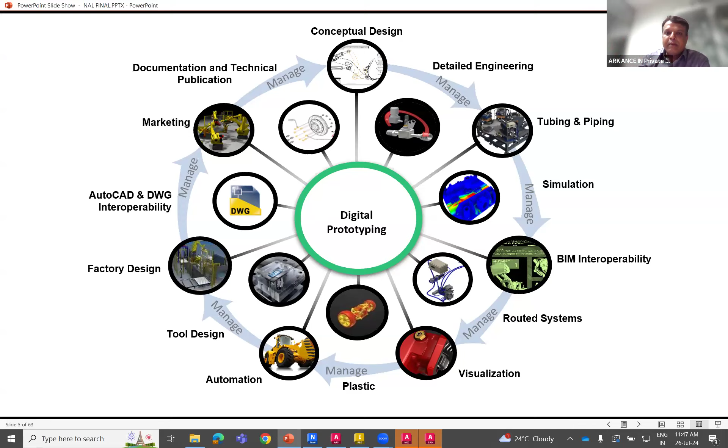Now, when we come to industrial needs, what customers are expecting in today's generation is a connected workflow. When you speak about connected workflow, what happens - I want to connect AutoCAD with Inventor for 3D modeling. Can I connect the Inventor 3D model to an FEA? Why? Because I'm going to have data connectivity and the data loss will be zero.

If I change the conceptual design, it's going to update in my 2D or 3D or the documentation drawing. Till today, what we do is create a 3D model and extract a drawing out of that so we can take a printout. Now, the input file itself is 2D.

At that time, what do we do? Again, we recreate it in 3D modeling software. In this scenario, the designer is losing about 30 to 40% of their drafting hours. I've seen customers using AutoCAD, then NX, AutoCAD CATIA, and AutoCAD SolidWorks - third-party CAD software, we call it.

Now, from 2016 onwards, our own Autodesk portfolio customers asked us, can we connect AutoCAD with 3D modeling? Why? So we can save time - anyway we are using both products from Autodesk itself.

Our development team worked this out and released this option in 2018, but till today only a few designers know this, because when we speak, we speak at the top level and they were less bothered - like 'we need Autodesk portfolio,' they just procure it.

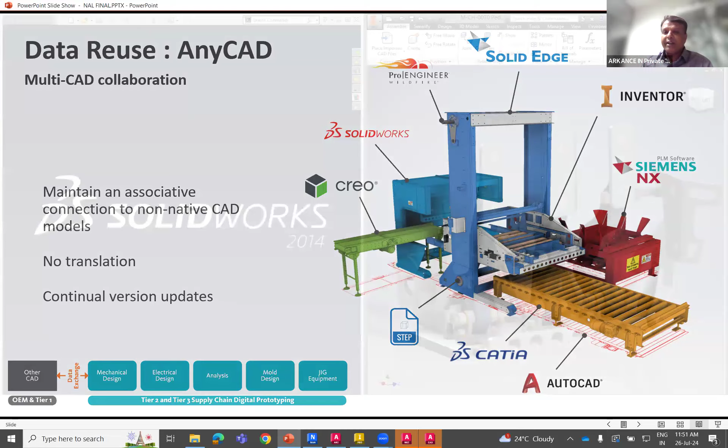And for the AutoCAD option, we call it DWG underlay. I'm going to highlight this connectivity between SolidWorks and Inventor. Later, I'm going to show you a live demonstration on AutoCAD 2D to 3D.

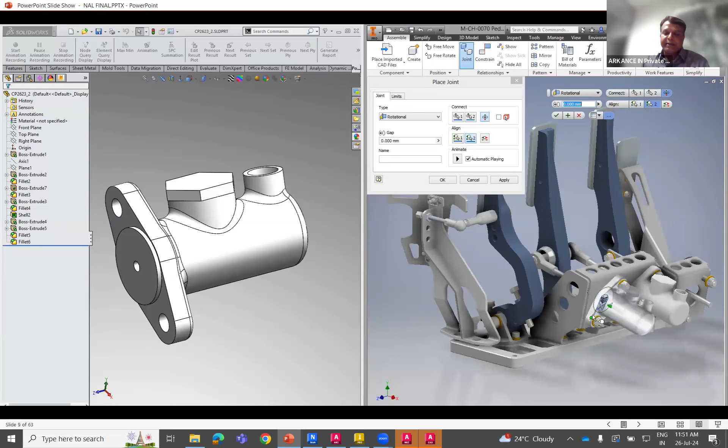Now, left-hand side is my SolidWorks. I'm opening a SolidWorks file in Inventor, and I'm going to use it for a regular assembly. Once I've erected these parts into my regular assembly, I request a design change - this is a wrong part, kindly update.

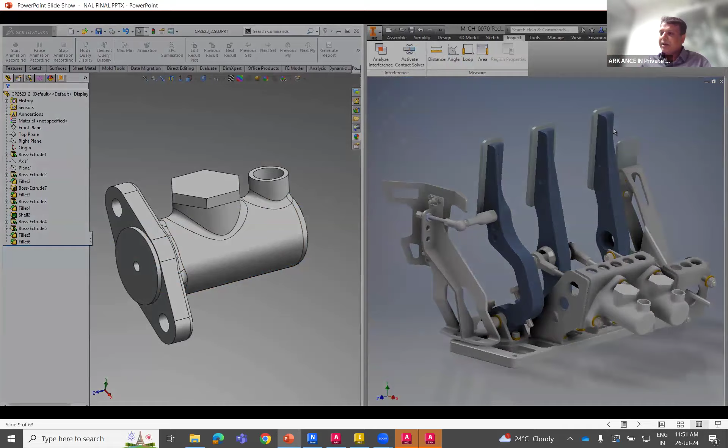The SolidWorks user is in the same intranet connection - let him change the design. Whatever design changes he makes, once he saves in his system, it's going to update in my system. Earlier, whenever there was a design change, we needed to delete the model and re-import it. Now, as third-party CAD software is connected with Inventor, and Inventor Nastran uses the platform of Inventor, changes done in the third-party CAD software will reflect in the CAD environment as well as in my FE environment. I'm going to show this live in the second session.

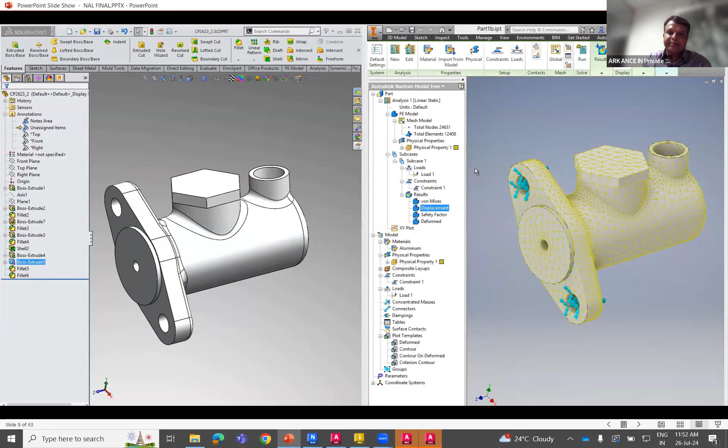So this is just an introduction, that's it. Whenever you have design changes in the FE environment, just update the meshes - no need to re-import the model and reapply all your loads and constraints. Just update your meshes, run the simulation, and extract the results. This is the connectivity between CAD domains, whether it's 2D to 3D or third-party CAD software to Autodesk.

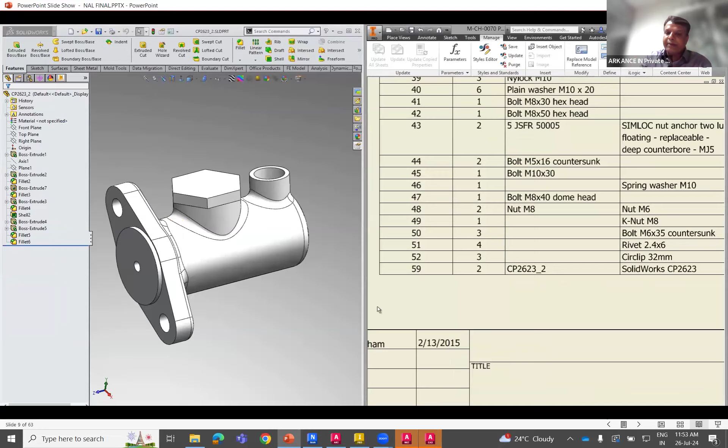And Autodesk Inventor is not only connecting the data between third-party CAD software, we can even read the metadata. Now, I have assigned some metadata in SolidWorks or NX or CATIA - that metadata can be read in Autodesk Inventor. It means some part number or reference number. This is how we are good with connecting with third-party CAD software along with Autodesk.

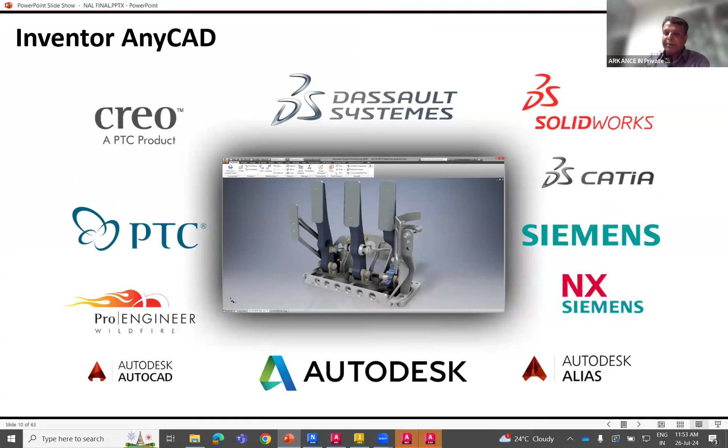Whenever we look at the Autodesk portfolio, we have AutoCAD, and Alias design also we can connect. Alias design is mainly used for Class A surface modeling. People will say Autodesk Inventor cannot handle Class A surface modeling, but we don't have an add-on for Class A surface modeling - we created a separate solution called Autodesk Alias design. Alias itself has three flavors.

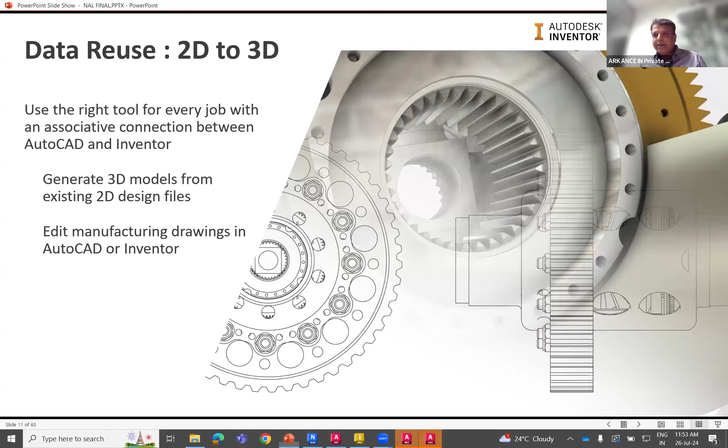Okay, now let us check into 2D to 3D connectivity. Let me launch AutoCAD. Okay, this is my AutoCAD tool. I have some other things got launched. Let me use AutoCAD Mechanical.

Can you able to see my CAD screen? Kindly confirm, Nishan. Yes, right now, yeah, I can see.

Just let me start from scratch. I'm going with new. Okay, I'm going to select metric.

I'm going to explain this from command to command. What we call this is UCS - UCS coordinate. People may ask, in 3D modeling, I want to take left side view, right side view, so we have this UCS. What happens in AutoCAD? AutoCAD even has a UCS. Sometimes your UCS will be always on the left bottom, and you don't know how to locate 0, comma 0. In AutoCAD, we have a coordinates method called the absolute coordinate method.

Let me say UCS icon, there is one command. If you enter that command, and you don't want that UCS to appear always on the origin, type UCS icon and say it as no origin. Then wherever you go on the coordinate value, the UCS will be on the left bottom corner. So whenever you're doing R&D on the 2D to 3D linking, this is important because every CAD file speaks to the other domain with that origin.

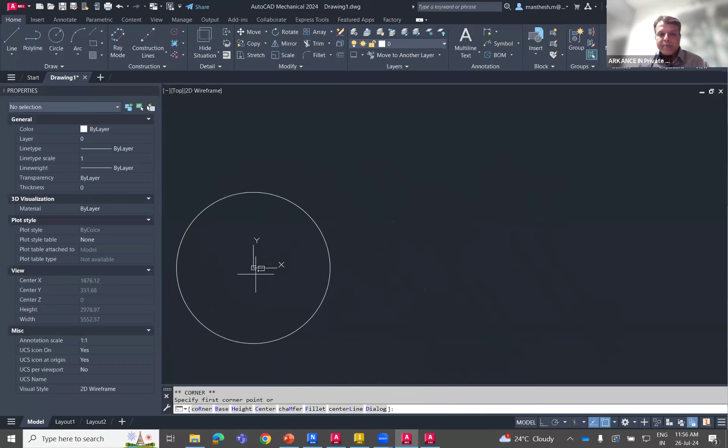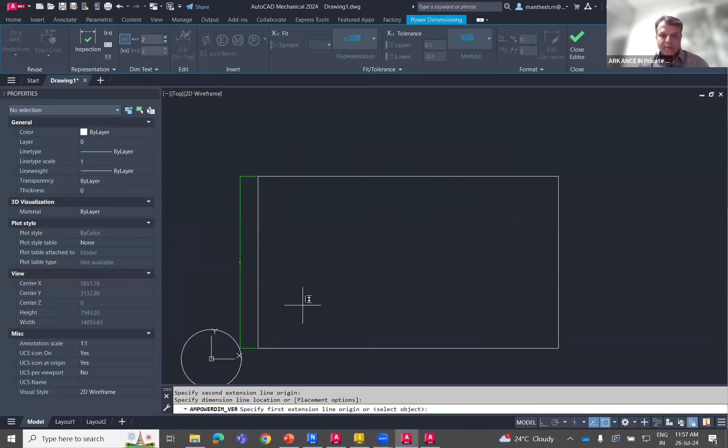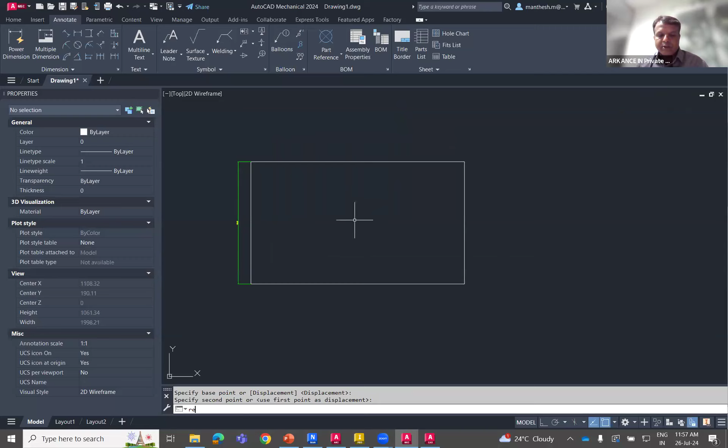Now I'm going to create a rectangle. Simply, roughly, I'm going to create a rectangle here. Let me check with a few annotations, somewhere about 438. And I'm going to use this. Now what happens after creating this, I need to have a few slots. I can have some slots, simply I'm going to create this.

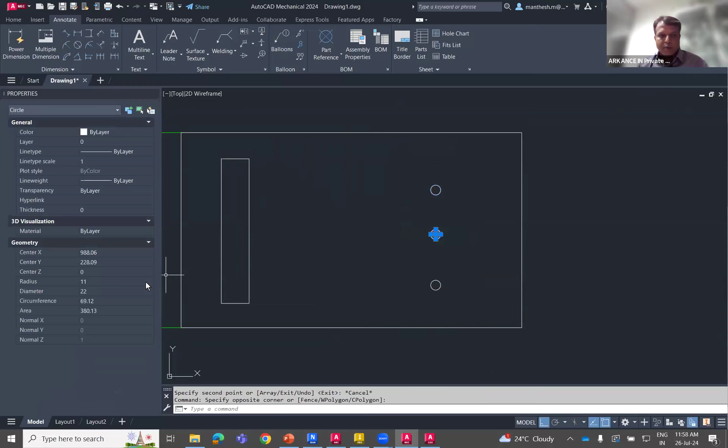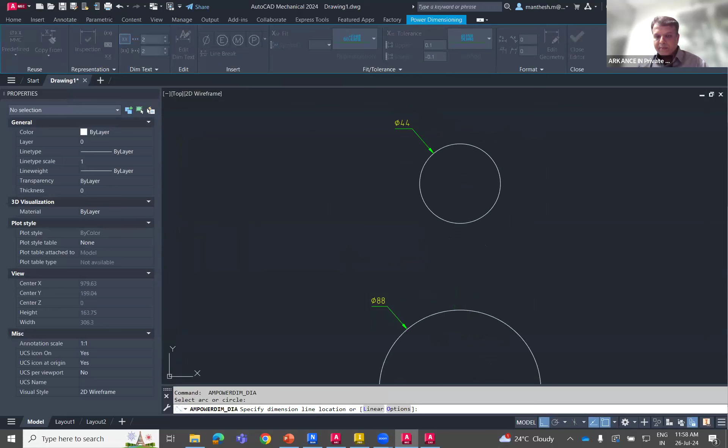Now I have a few holes, the dia 22. Again, I'm going to copy this with an F8. I'm going to make this as dia 44 and this has 88. Now let us assign a few dimensions. There, I have this slot.

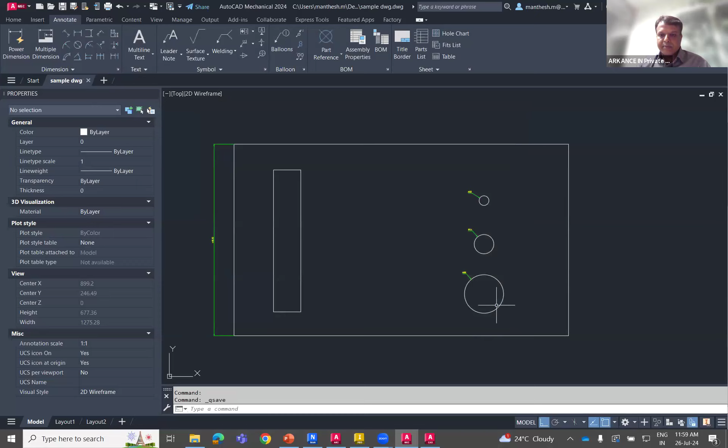I want to link all the files to my Inventor Professional and create it as a 3D model. Now let me save this file into my desktop. I'm going to save it, say it as sample, DWG. I'm going to save this. Done. So this is my reference drawing.

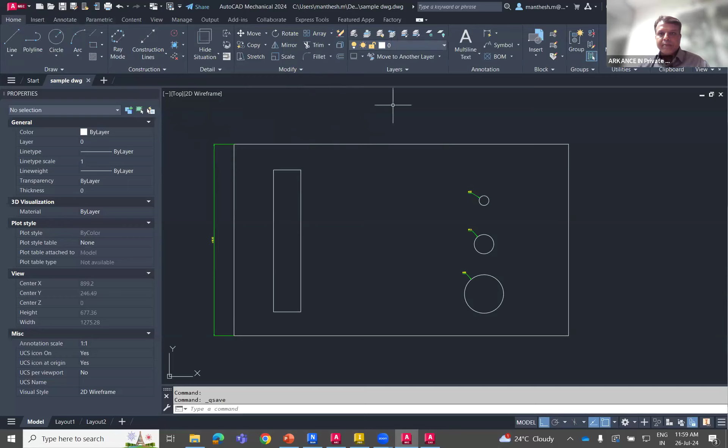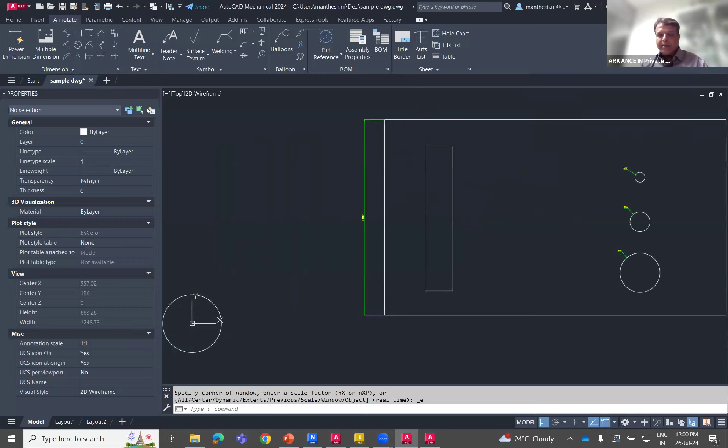Now whenever I'm using AutoCAD Mechanical or AutoCAD, automatically layers are created. Assume that I'm going to use some center marks. So the origin is here. I have saved this file. Now to connect this file with my 3D software.

Just launch Inventor - already I have launched the Inventor. So whenever I launch the Inventor, this is how my user interface looks. So what we do is just say new, then metric. I want to create it as a part, standard MMIPT.

Before entering into the sketch environment, I want to link my AutoCAD file. Before doing that, I have saved this file and let me close this so that the data connectivity will be very easy. We use this import command to import any other 3D file formats. The same command I'm going to use, import, but I'm browsing my CAD file. On the desktop I have that file, this is the sample drawing. I'm going to open it.

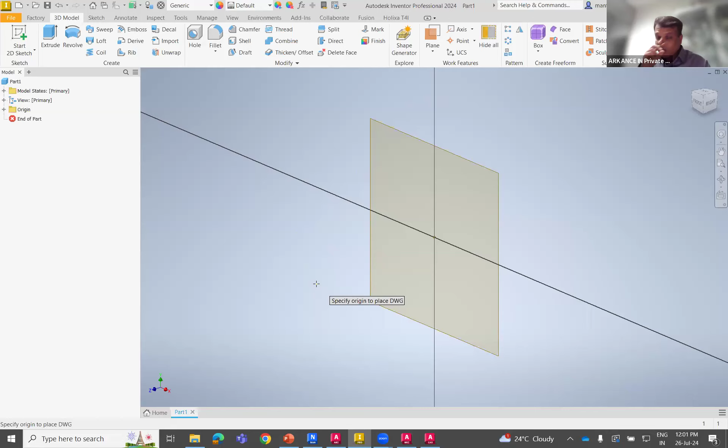So it will ask on which plane you want to connect this - okay, on this XY plane. And what it is asking on the command prompt is specify origin to place. Now what I'm going to locate is the AutoCAD origin - origin must be on my CAD origin. See, the origin I located is the center of the circle, which is aligning with my Inventor part modeling center point.

Till now it's clear. Any doubts till now? If you have any doubts, kindly post it in Q&A.

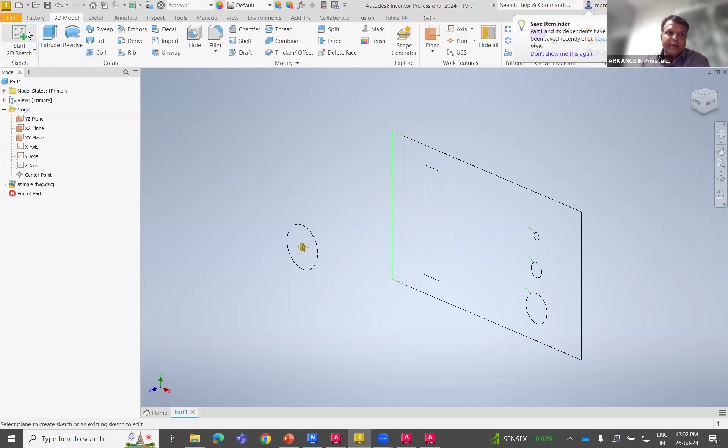Okay, I assume that it's clear. Now, I have to say, I have linked the file, still I have not converted as Inventor sketches. What I'm going to do is start a 2D sketch. I'm going to select a plane. See, I want to create a sketch, so I need to have a plane. I'm going to select a plane which is parallel to this profile imported.

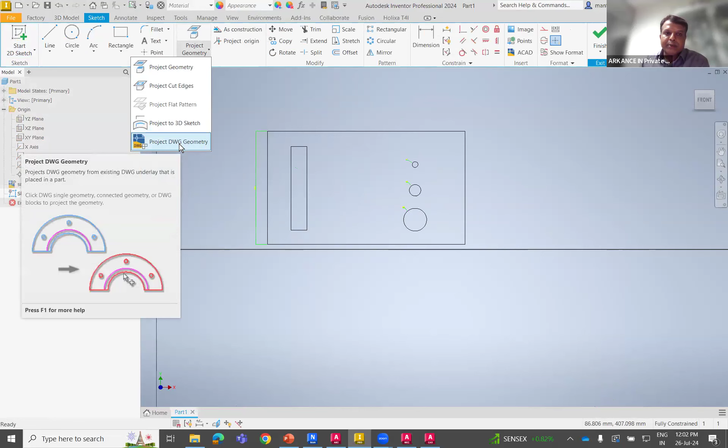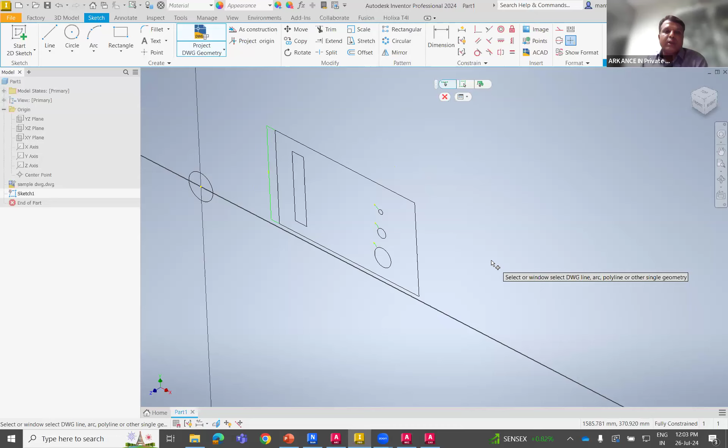Now, in the project geometry option in the sketch environment, I'm going to highlight. We have something called project DWG geometry. Use this - which are the lines? Whenever I import or link an AutoCAD file, it will be having data connectivity. At that time, I'm going to get all my hidden line construction lines. But to create a 3D model, what I need is only the profile line. It will highlight which profile lines you want to use, so I can project only those geometries.

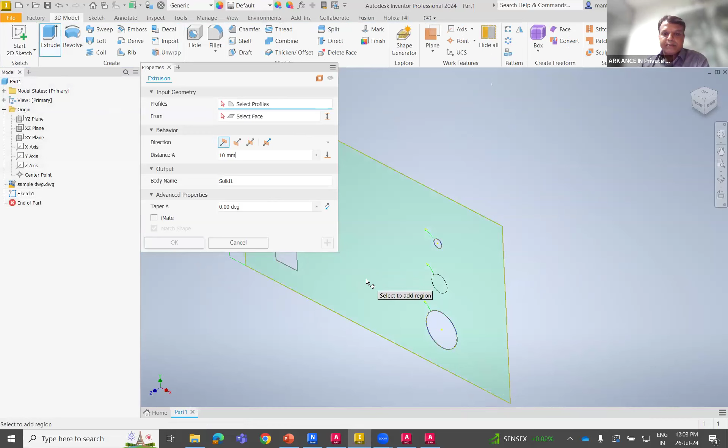Okay, see? Right click. Okay, done. I'm going to set it as finish sketch. I'm going to use the extrude command. This must be like 10 units. Okay. Now this has to be projected out.

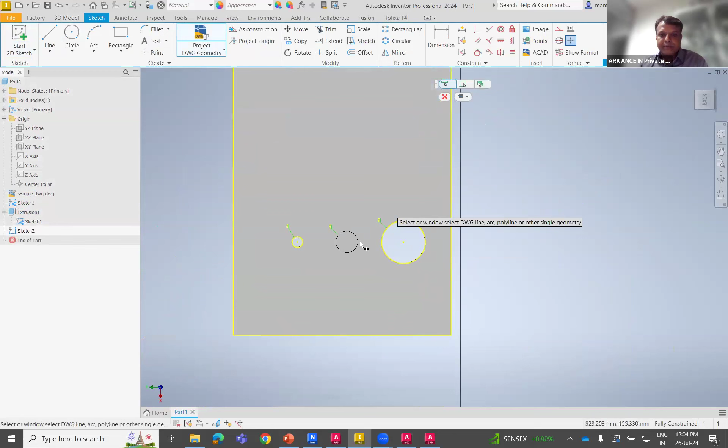So after having sketch one, I can right click and share the sketch if you want to reuse it, or else start a new 2D sketch, project geometry, finish, and now use it for extrude.

I'm going to save this file. Same project, I'm going to name it as part one or project one, something like that.

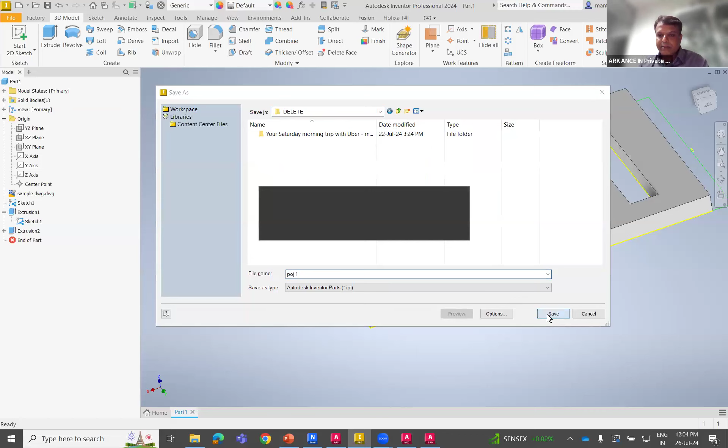Now, one good thing is whenever I link a 2D file to Inventor Professional, and I'm not going to assign any parameters here - I haven't created any parameters - but if I observe what automatic parameters it has created, let us check that. See, one is like 40mm the height of extrusion, and another the holes we have created, that's it. But on the XY plane there is nothing like parameters added.

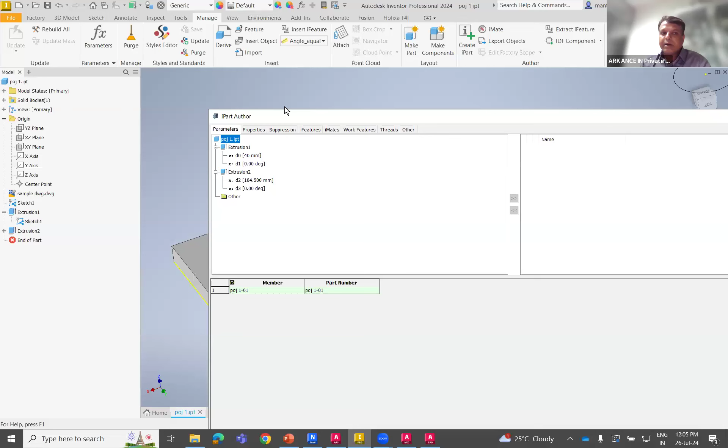So if I go to manage and want to create it as an iPart, see, I don't have any extra parameter other than the height of extrusion 1 and extrusion 2. This is one drawback if you're linking your CAD files this way - you cannot create all the features which you need in iParts. So always ensure whenever you're starting the design by linking 2D to 3D, you cannot call the 2D data for iParts.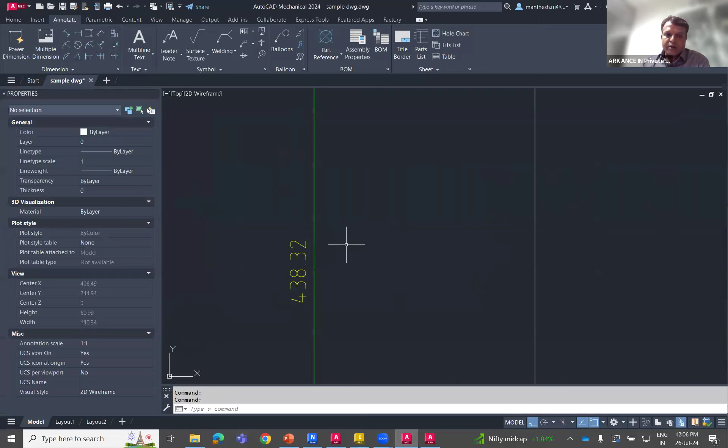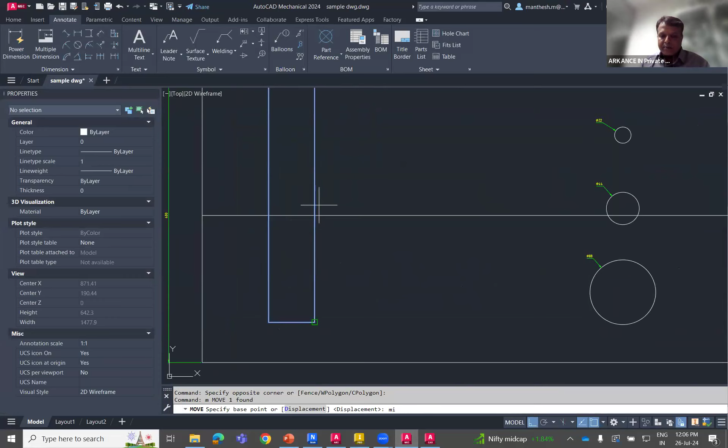Already I've saved this. Now I need some revisions. I can open my 2D drawing. Now this is about 438.32. I want to reduce the width to 38.32. Okay, I want to bring it along the center. Let me bring this slot. And this radius, I want to make it 22. And again, this has to be 22.

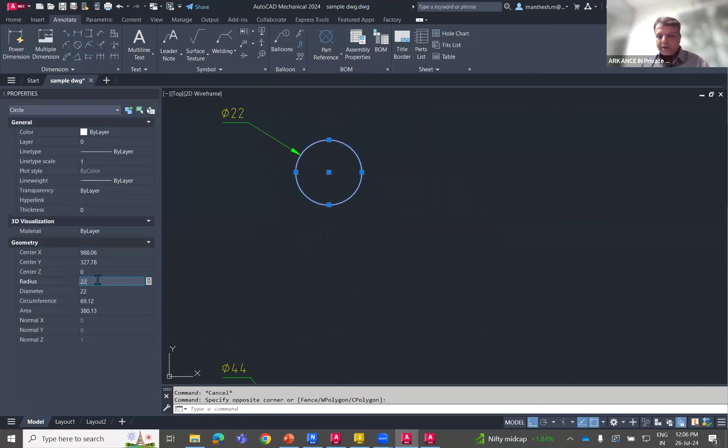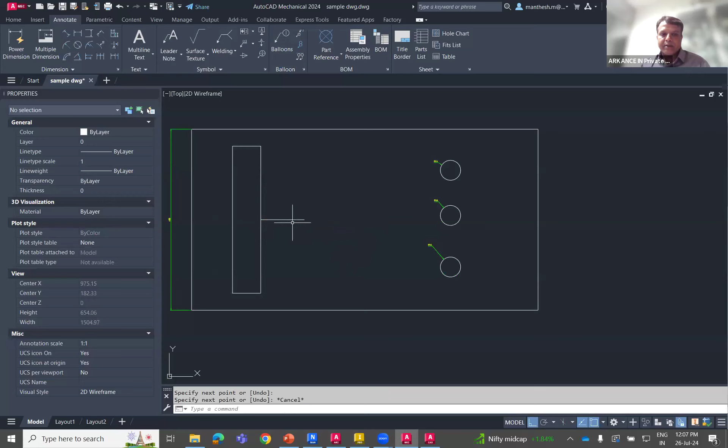Now, when we projected this, assume that if I make this an open loop, what happens is the extrude will give a warning mark, and you need to reselect the profile. People may ask, if I add some objects here, now this is done - if I add some more thing on this particular detailing, let me take an example, something like this, move it 30 units. What happens now? Now these profiles are not projected.

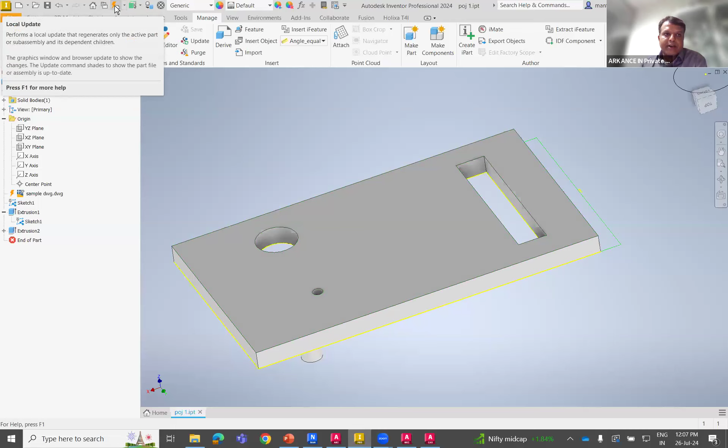I'm going to save this, close. Now let me check in Inventor. There is no update, but there is an automatic update highlighting with a warning mark. Pick it - see what has happened. It has kept the previous one.

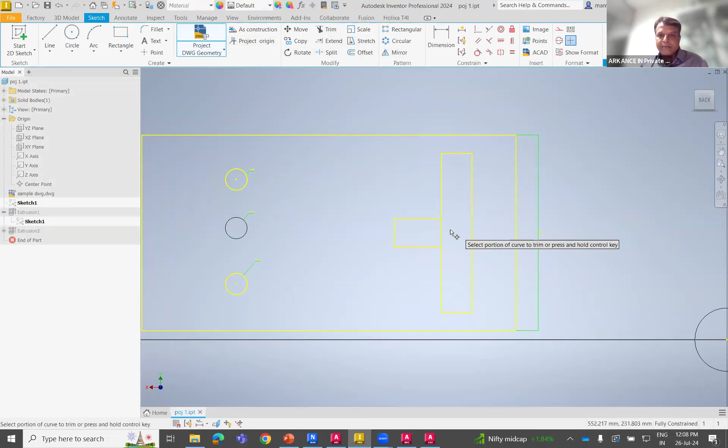Again, I can enter into sketch one because the projected thing is not lost. Project geometry - I can use this, then I can use it. Okay, I cannot use it straight there. Let me delete this. Again, project geometry - this.

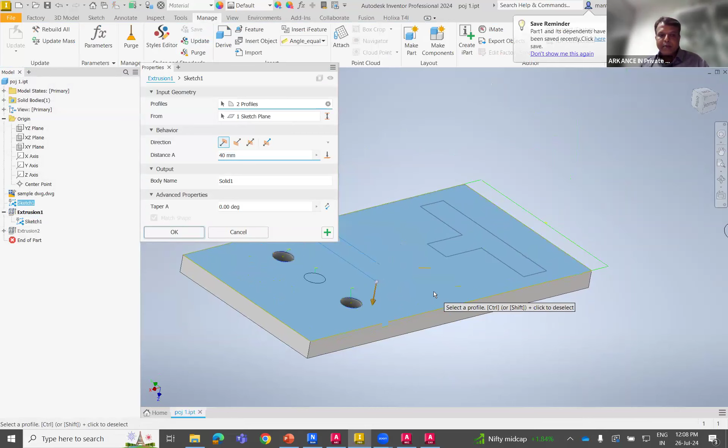Finish sketch. Okay, and even on extrusion one, either I can select the profile or else directly go with one more extrusion to cut the material. But if you observe, for an already existing profile, changes in the values are automatically updated. But whenever you have changes in the shape, or the closed profile is making certain changes, at that time you really need to rework on this, because when you select with the create option, you need to select that particular area there.

Am I clear till now? Any doubts, guys?

There was a question from Mallikarjun about dimensioning - whether layers were created beforehand. No, layers are created automatically in AutoCAD Mechanical. AutoCAD Mechanical is one of the automation tools which will create the layers automatically. But that automatic layer creation option is not there in regular AutoCAD. If you use the vanilla flavor of AutoCAD, you won't get that. You need to install AutoCAD Mechanical only to get the layers created automatically.

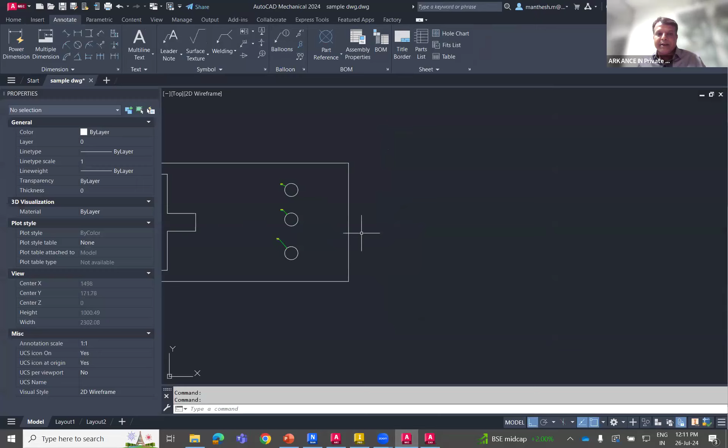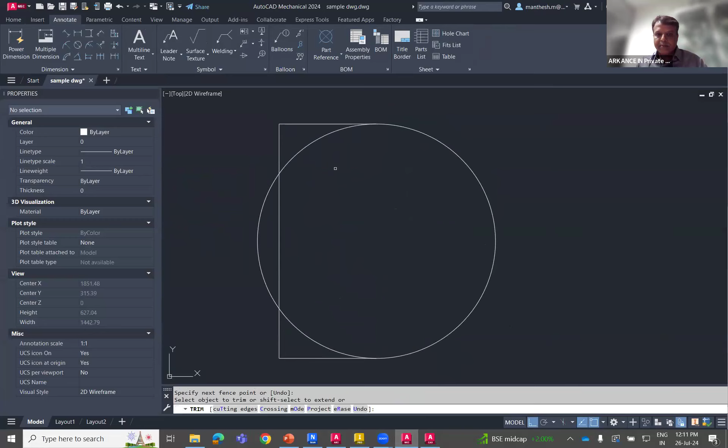Let us forget about this design. Let us create some new design, something like this. Midpoint, node, quadrant, perpendicular, tangent. Something like this.

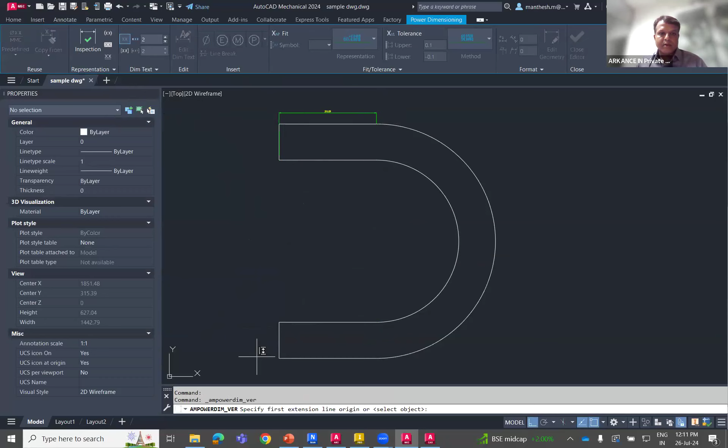I need your attention now. Basically, what happens - a few of the designers are very intelligent. Is it? What do they do?

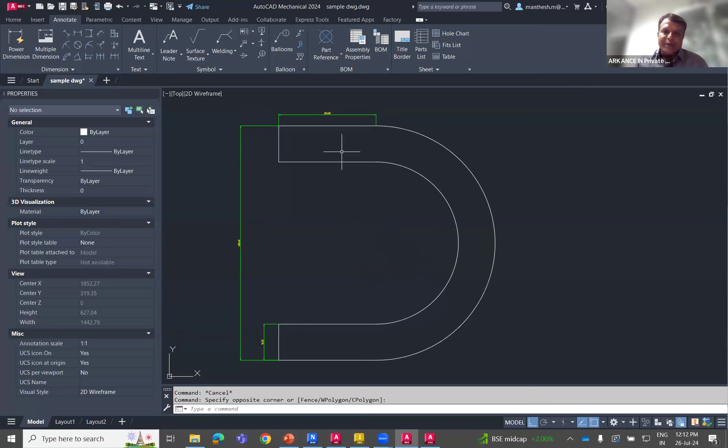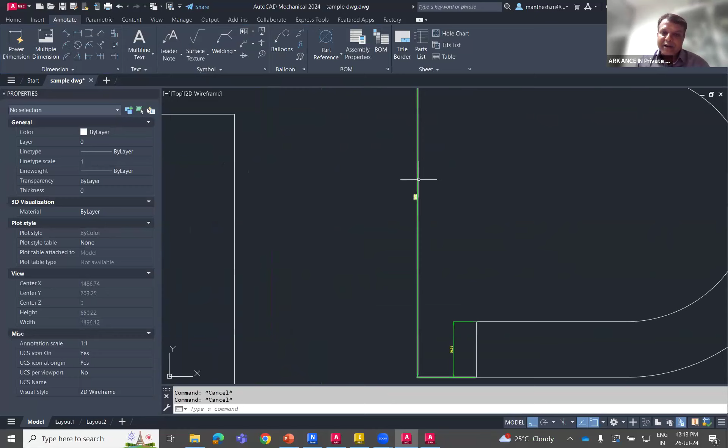Everything works on an origin or a reference point. Now I have this - there are a few very intelligent designers. Assume this has to be 500 or 496. What they do is they won't change the drawing - they double click on this, delete it, and type it as 500. Then what will the designer, draftsman or manufacturer do? He will assume the total length is 500.

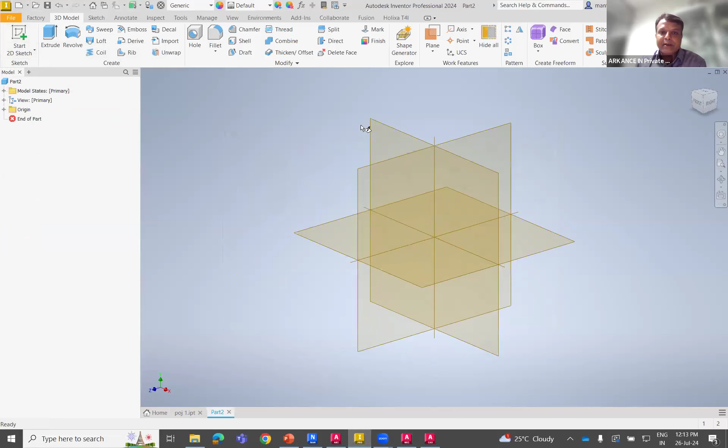If I link the drawing, whatever parameters you have edited are nowhere concerned because it works on the profile line. Now we have one more option - I can copy the file with Control C, and come to Inventor. Let me take a new file, then enter into the sketch environment, select the plane, now paste with Control V.

Yeah, completely everything we have here. But if you observe the communication area, 16 dimensions needed. Got it? But observe this value - intentionally we changed it in AutoCAD to 500, but it has taken the exact measurements. Whatever annotations or dimensions you give in AutoCAD, when you copy and paste to Inventor sketches, automatically it will get converted as dimensional constraints in Inventor, and it will take the exact parameter.

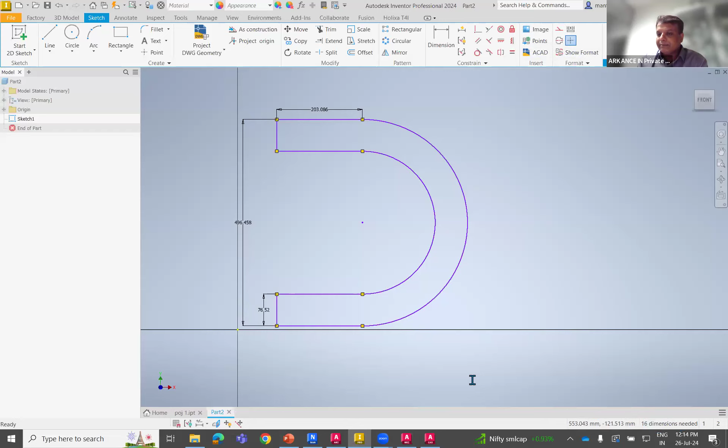If you have overwritten it, it won't allow 500 - it will come back to the original thing. That's why we call it parametrical software. Now there is no link between AutoCAD and this file, but the thing is I need another 16 dimensions. Is it? Okay, let me select undo, Control Z. Sorry, cancel.

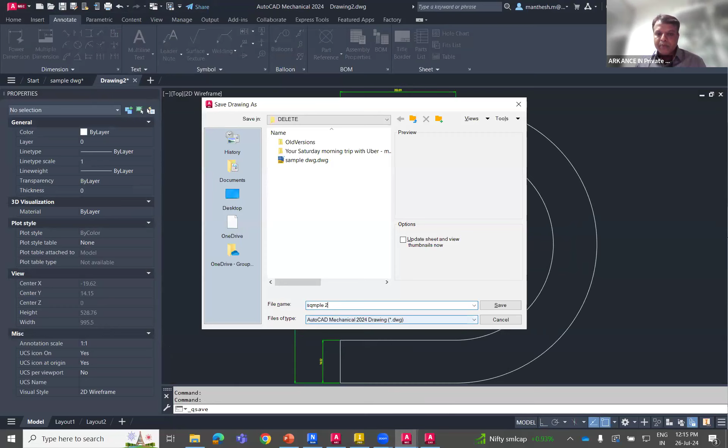Now there is one more method of bringing a CAD file. I'm going to paste it in a new file with Control V. I'm going to move the center to origin 0,0. Save this in the same folder as Sample 2 - this is an independent drawing. I'm going to close this and come back to Inventor.

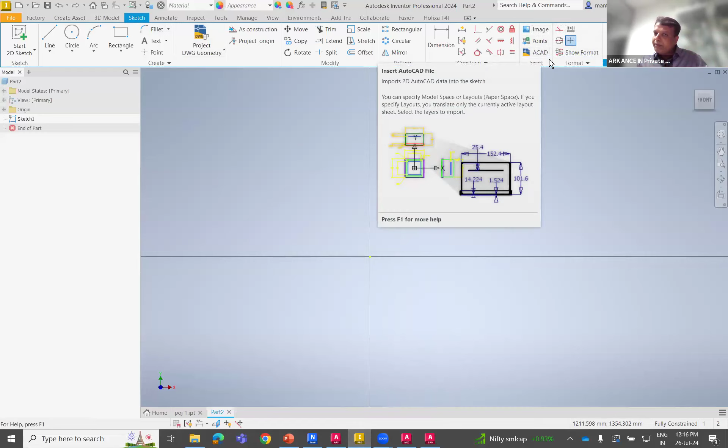I want to bring the CAD file, so just as earlier, open the sketch environment. In the option, once you enter the sketch environment, we now have something called insert from AutoCAD. So I need your attention here - whenever you use this command, still there will be no link between 2D to 3D. If you need to have a link, before entering the sketch environment, use the import option instead. AutoCAD, Sample 2, open it. Yes. When I use this insert command, it will take about 3-4 seconds to scan the entire drawing.

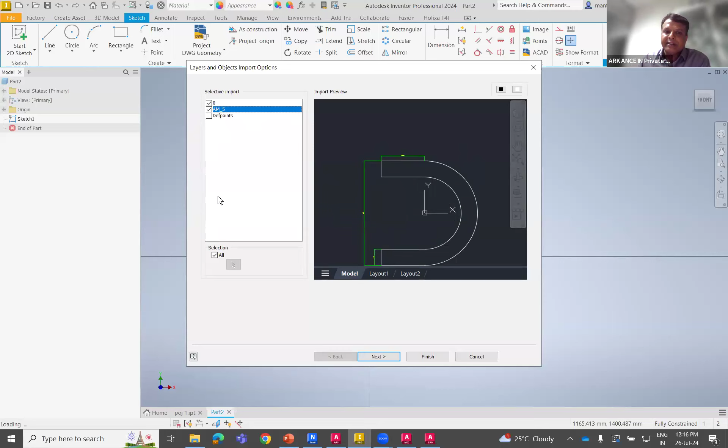And I'm going to get a pop-up menu. Now, if you are really using layers, what happens - I'm going to get all my hidden lines, everything, is it? If I use copy and paste, I can switch off those things I won't need. See, I need both of them. I don't want these def points. If you have hidden construction lines, you can disable those layers here.

Okay, don't just say finish, pick next. I need your attention again on the screen with 50% concentration. Detected units mm, then constraints endpoint - I want all the endpoints to be constrained, something like geometrical constraints, where a horizontal line gets horizontal constraints and a vertical line gets vertical constraints. I can select - if you have any blocks from AutoCAD, you can convert them into Inventor blocks. Then say finish.

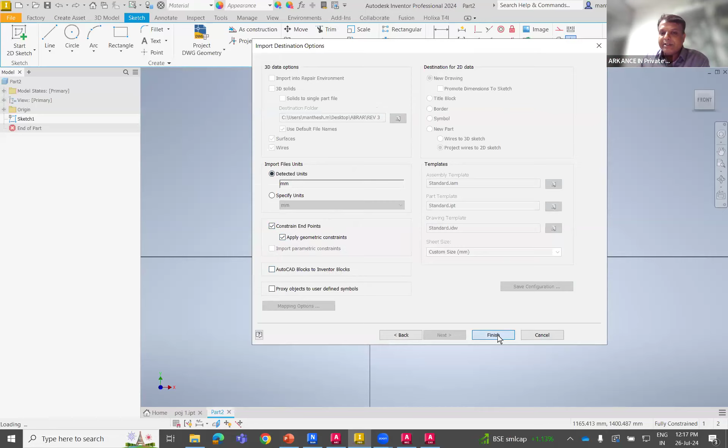Now, how many constraints do we need here? Let me select Control Z. Only 3 dimensions - earlier how much did we have? 16. Now if I use this option like insert from AutoCAD, there is no link, but I can reduce the constraints. Whichever parameters are not given, I can create those parameters, is it?

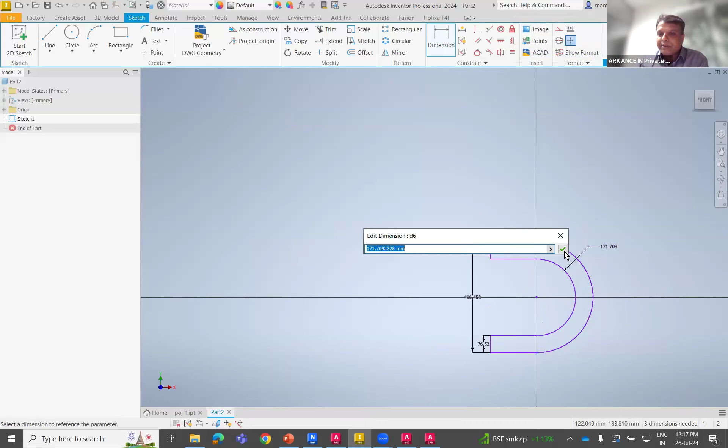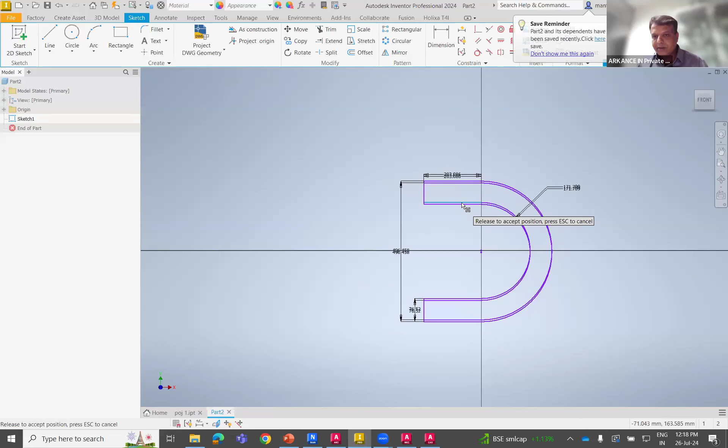Answer. Okay. Then, okay, 3 dimensions again is somewhere missing. Again another 2 dimensions - just you can surf with those dimensions.

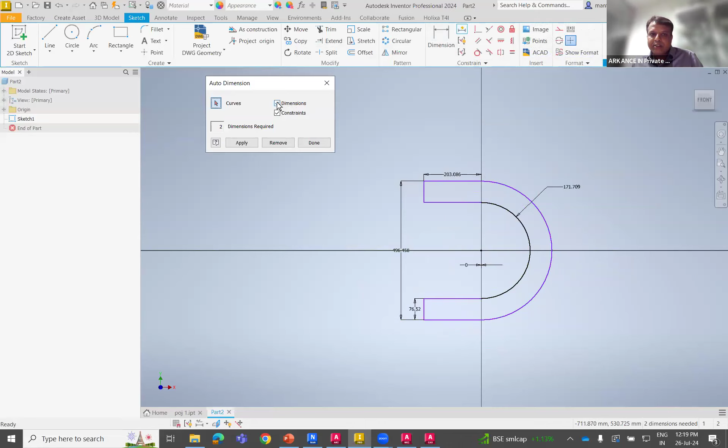If you trust that whatever you have created in AutoCAD is 100% right, in this option you can use automatic dimension constraints. Whenever you get this, use only dimensions, remove the geometrical constraints, apply. See, we have a few things like on the origin - it may be some points which have not got constraint. That's the problem. Remove it, and you can check and delete those.

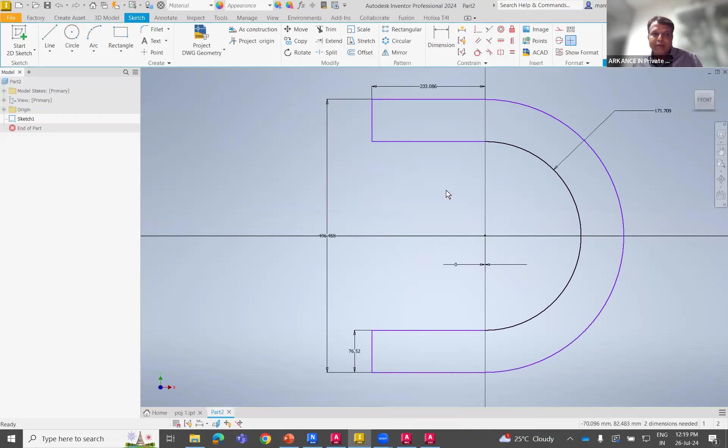So you would have done it before, or else again you can say project origin, and project that, and do the constraints. But still here you don't have. I'm going to recommend either you link the file or use this insert option. Never use copy and paste.

Okay, finish sketch, and even if you have inserted from AutoCAD, you can enable these parameters for your iPart creations.

Now I had a question: can I see that is one view, what happens on the other side of the view? Assume that a file has a top view and a side view. So side view has to be created on the side. Now the top view is there.

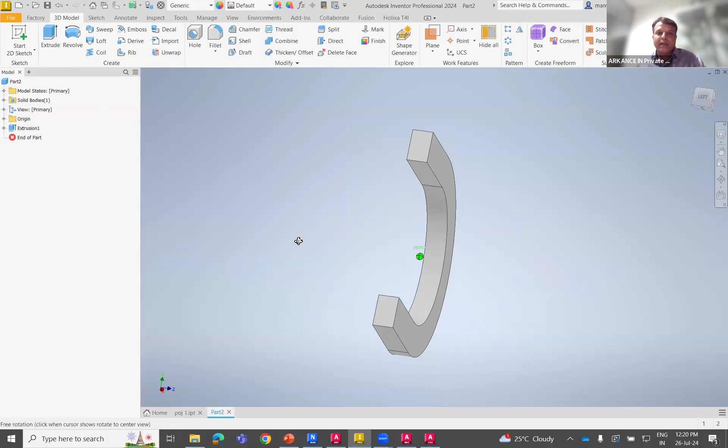The side view you want to link - at that time go to import, select the same file. If you have any side view with an origin, you can import that on any plane with the origin placement. Then you can use it like a side view. Just create one simple rectangle with the thickness and try it.

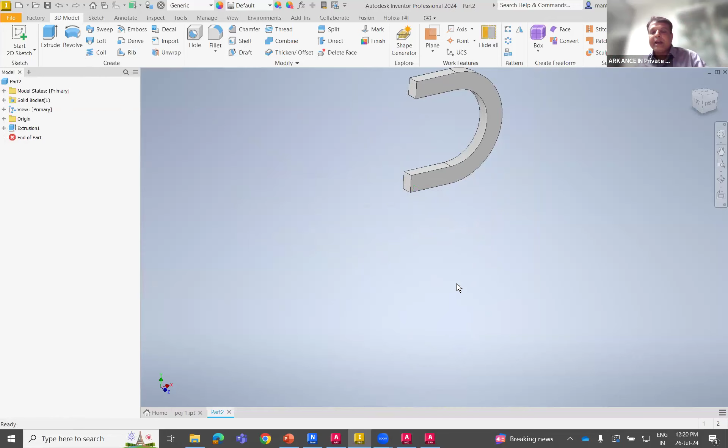It works. And Kashyap asked me like, does it work the reverse way? Now this is one part - I pulled it from 2D to 3D. Post that, what happens? We are going to create a documentation file, is it?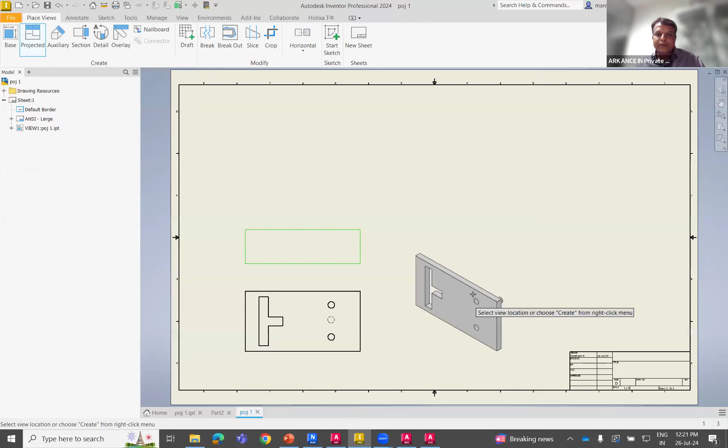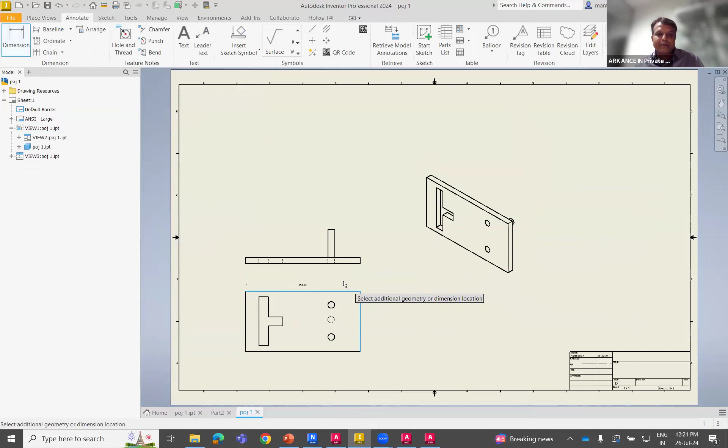We always trust 3D, not 2D. Now if you create any parameters here, okay, now you have to change this. If you change the value, that has to get updated in the 3D model. Really, as of now, it's not there. 2D value - so if you need that, it has to be done in AutoCAD itself. If you're changing in 2D, you change in 2D. Now if you change in AutoCAD, even this will get changed.

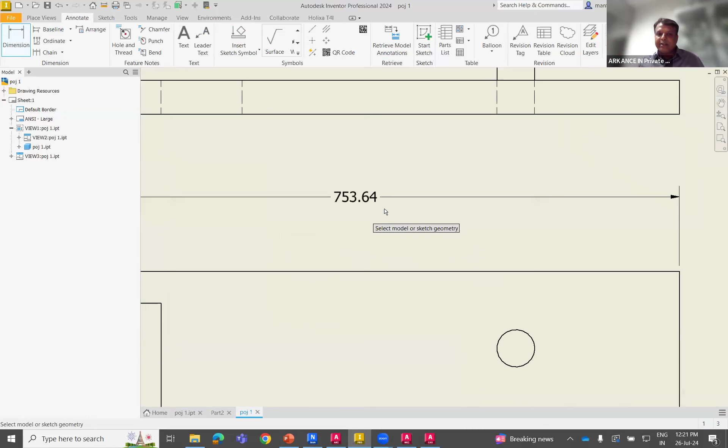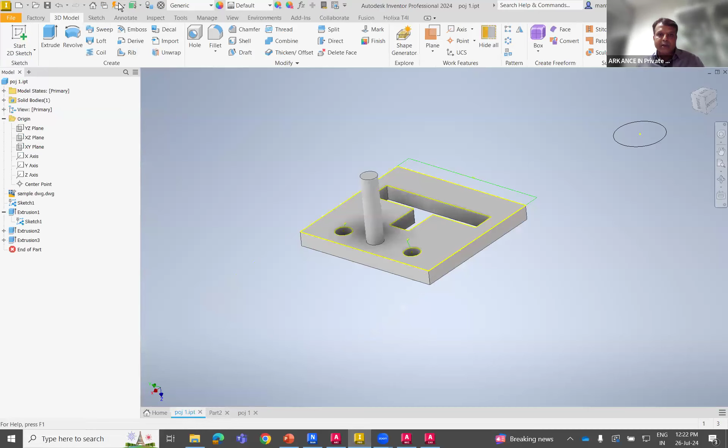If you want me to demonstrate the same, okay, let me reduce this. Save this. Close. And what happens in the part model? Automatic update. What happens in the documentation? Automatically updated. Clear?

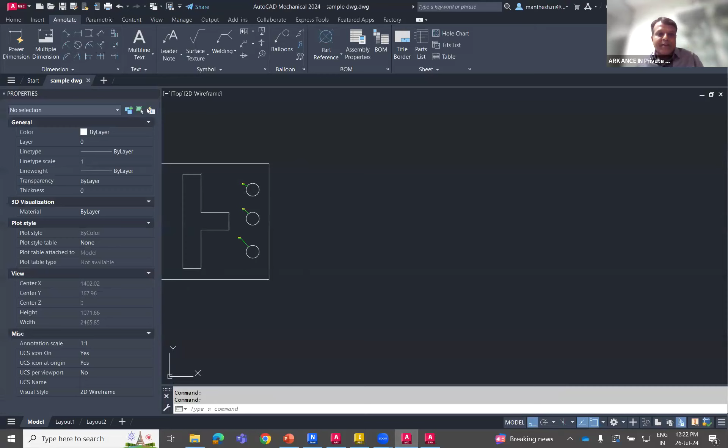One or the other way, I can give you a solution. As 2D is linked with 3D, and again from 3D we have extracted 2D, change in AutoCAD. Now in AutoCAD itself, somebody will ask like, I don't want to use this stretch and other command - it just has to be driven from the value. Now this is a dimension, is it?

What I can do is use an option called parametric. Then linear constraint. I don't want to use the stretch command - just everything should work on the values. Then I can use like perpendicular - this has to be perpendicular to this, and this has to be perpendicular to this. Same like Inventor constraints, and this has to be perpendicular to this.

Now only changing the value of the object should get updated. Double click on this one. Now make it 600. Object changes. Save it. Check in Inventor. Update. Check in documentation. Update it. See.

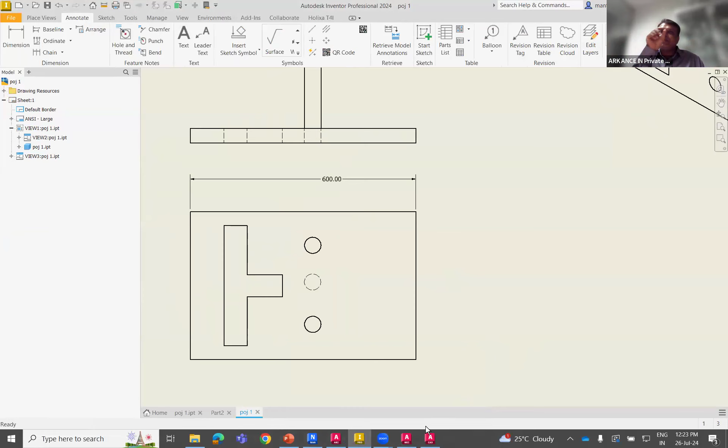Initially, I always recommend when you're starting something, whether it's a product or a big assembly, plan your end goal. What is it that you need at the end? Whether I need to control everything from AutoCAD, or whether I want to control everything from parametrical dimensions only. At that time, you can use dimensional constraints in AutoCAD and drive the object through that. These features really help a designer when you're building everything from small things. But there is a difference between a designer and a draftsman, a designer and a 3D modeling guy. These are the things which will enhance your skills along with product knowledge.

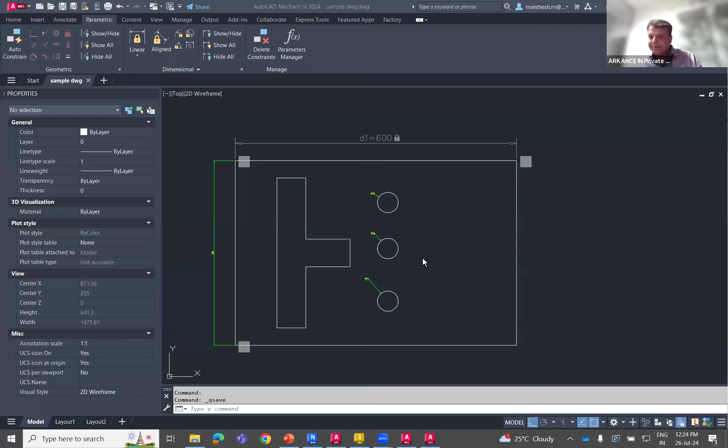Hope that Kashyap, I have answered your query. Siddharth Reddy and Mallikarjun, I never recommend you, as a professional user of Autodesk Inventor, to use copy and paste. Kindly insert it from AutoCAD instead.

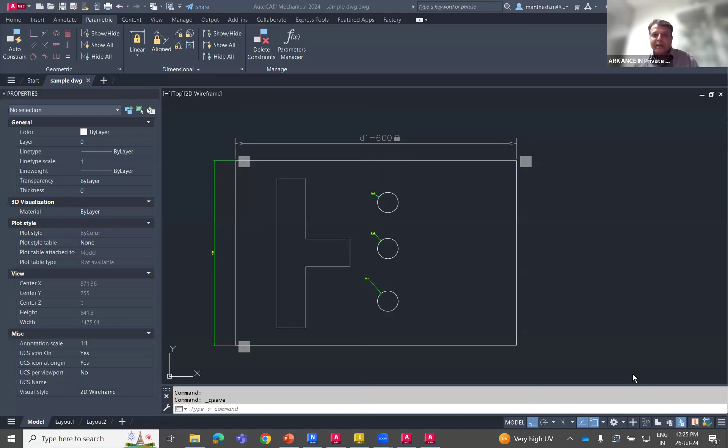Okay guys, how was today's session? Anwar, thanks for your feedback. Next, Nishant, can you come on the line? Yes, according to me, the session was wonderful, sir. Thank you so much for this insightful session. I hope all the attendees will think the same about it.

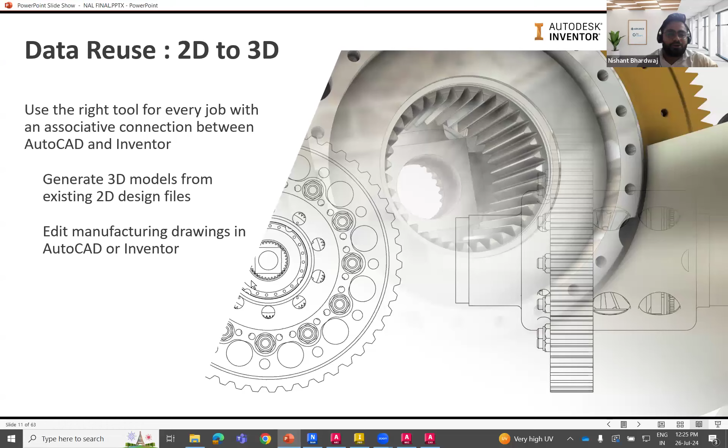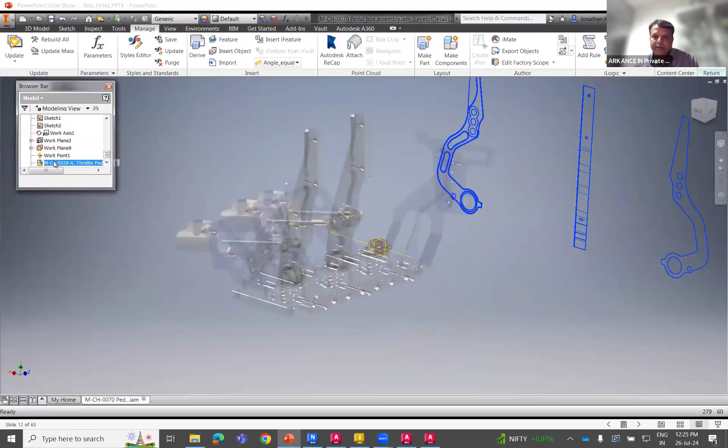Now, somebody asked me about connecting 2D and 3D. So for the side view, we are going to explain using the DWG engine, which has front view, side view, and so on. I have imported the files onto a plane. I'm going to use project geometry here, and then project only the profile lines. Then I'm going to use the extrude command.

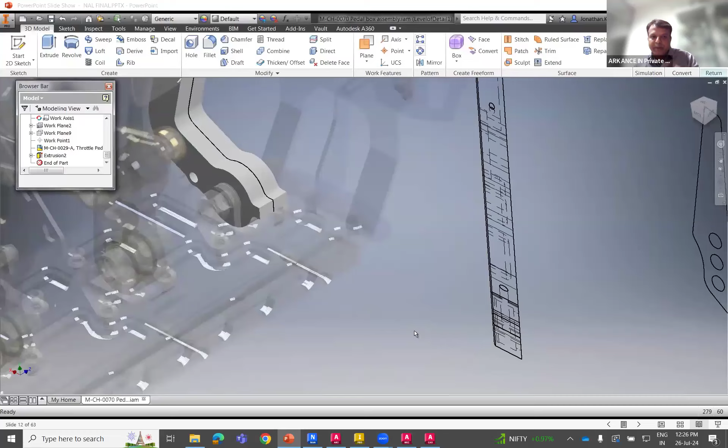I need your attention here. Whenever you're using extrude to add thickness, you'll be getting an option like distance. At that time, I can select the side view lines, two lines. So if you select those side view lines, changes in the side view will update the thickness. Just kindly try it once on your own, and I'm going to show you like this. If you go in this path, there are resources. You need to find out that path. Since we're not there yet, in the second session I will show you that.

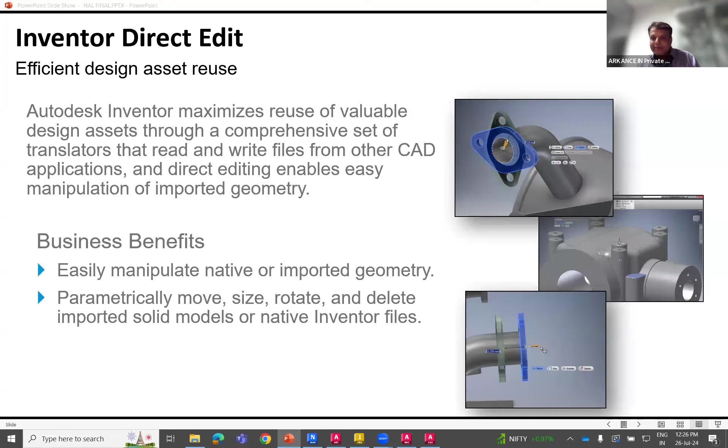For the day, I'm done. Probably these are the few things I planned for the next session. If you have any doubts or queries, kindly post them.

Neha, thank you. Nehal, thank you. Raj, thank you. Reddy, thank you. Sushil, thank you. Patil, Gaurav Patil, it's our old colleague.

Mallikarjun, thank you. Vinayak Manjrekar, sir, I would like to confirm once again that if we import a 2D sketch to Inventor, the AutoCAD files get linked with the 3D model, while if it is taken from AutoCAD using insert, it doesn't get linked. If you use the import command, it will get linked. Insert means I'm completely bringing it inside Inventor. If I import, it means I am linking it.